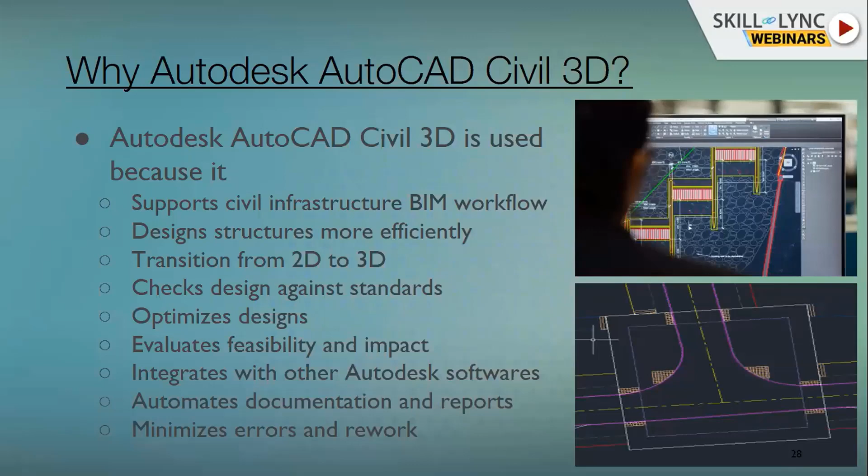It compares in 3D as well as 2D, so that we can visually see where we are standing in the design, and it makes our work much easier.

So here also there are lists of parameters where we can use. As I was saying, documentation to delivery standards will be made smoother, and we can configure and customize those parameters. We can deliver 3D models directly to different machines.

Once we do this, we can just give it to the surveyor or the contractor. We can use those 3D parameters for his automated machines for the construction of the road. So that also we can do very smoothly here.

Apart from that, there are multiple softwares which do highway designs. We can export from that software and build it into this Civil 3D application in response to project changes, because all the features are interconnected.

We can run through the process very quickly. Again, the design changes automatically update, and it provides better estimation of materials and dynamic calculation - those analyses also we can make.

It shares and updates the model in real time, because nowadays clients expect all models to be uploaded to their cloud base. We work directly in the cloud, so that whatever changes we make here will be uploaded and checked by the clients directly, without any separate submission. Only through emails we communicate that the model has been updated, please have a look, so the client sees it in the cloud.

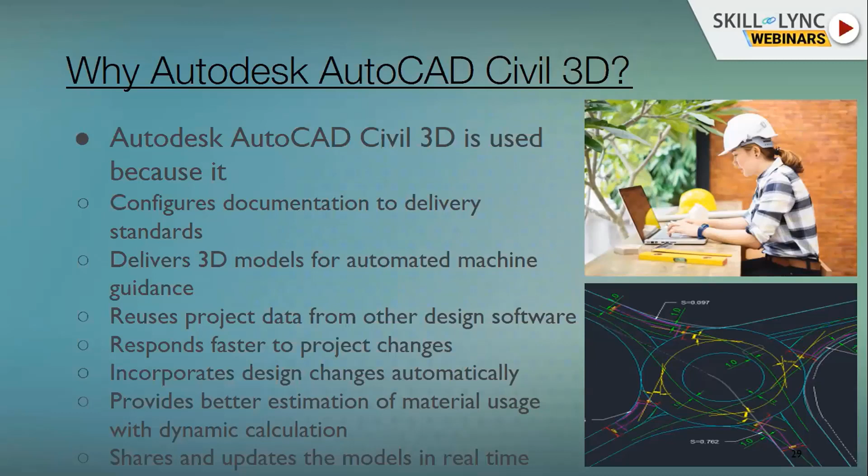So the design updates, and those are the many advantageous things we can achieve using these applications.

Next, I will try to show the workflow of Civil 3D applications - the standard template. It's not compulsory to follow this process, because around 80% of the time we will follow this process only, since every project is unique and different. So we need to take the project within their priority, and give the input to Civil 3D, and we need to design.

But overall, there will be a standard procedure we need to follow. That process I'll be explaining in the following slides.

So, AutoCAD Civil 3D workflow basically - what I try to say is AutoCAD Civil 3D features a range of design and analysis objects within the three-dimensional dynamic engineering model. So it gives an option for a designer or analyzer to make his decision on how to go about a road project in a standard manner, so that it can give the best design, safe design, to the end user.

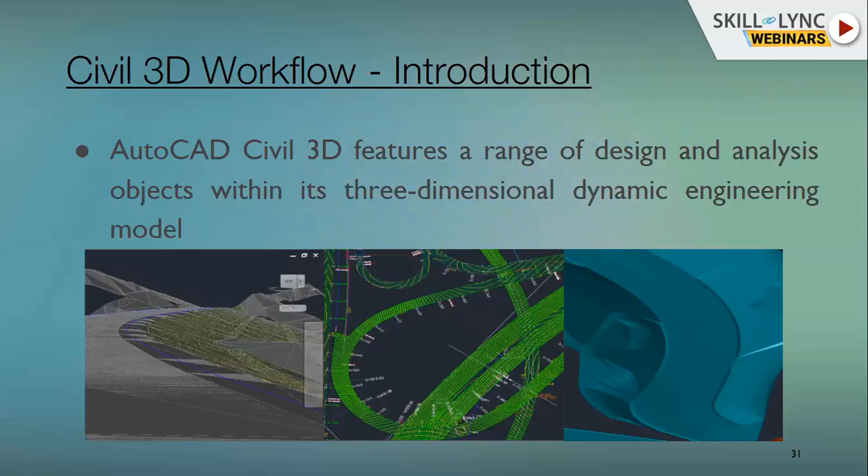So the basic workflow will be: whatever survey data we need for the design of the highway projects will be collected first. That may include points, lines, surfaces, or alignments, or even the corridor directly. So that can be imported first, and we try to do the design accordingly.

All the objects of Civil 3D have a hierarchy that can be viewed in the interface component called the Toolspace. As I was explaining in the overview slide, all will be controlled in the Civil Toolspace command, starting from the survey, alignment, corridor, and the report generation.

Once we familiarize with that, the next parameter, which we need to do prior to going into the further steps, will be the label styles and edit label styles, which is very important. It decides how the cross section looks, how the DTM or the road surface looks, how the alignment looks, how the corridor superelevation looks, or visibility looks, or the final output, like the drawing, looks. All these are controlled by the label styles, so we need to prepare that first.

Many times, each consultant, for example, will have his own set of style sets, what they use as standard. So they will create it separately, and we will use this for all the projects. So we need to create it first. That can be controlled using these settings commands.

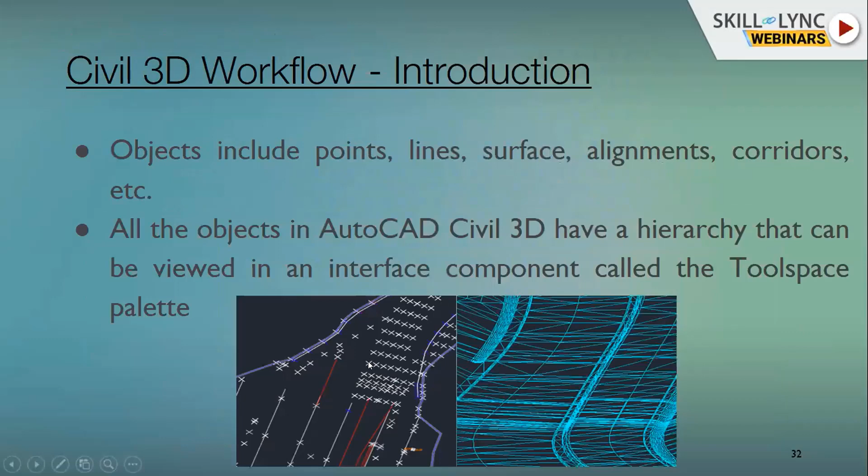For example, this one, these are the points, we can use them directly, and these lines are called breaklines, which we can use to generate the DTM or the triangulation, as we call it in technical terms, to create a DTM or the survey surface.

Another format will be the LandXML format. This is one important export format of Civil 3D, where we export survey data from another design or another team. We can just take their design or their data directly into our Civil 3D application.

So for all the parameters we showed in the Prospector tab surveys, you can see here these are the scenarios where we can import all these parameters. And if you just right click in this portion, there is an option called export to LandXML. So you can export a particular survey you have created for that region, or a particular alignment or particular corridor, or we can just export in LandXML, and we can use these features in other drawings as well, for other designers or other clients, whatever it is, we can just transfer the data. So that's one import method.

The other will be Genio. Genio is nothing but the other applications in the export system. That also we can upload by using separate toolbars where we need to do the add-ins. Add-ins are nothing but extra features in Civil 3D where we can add other applications to Civil 3D. For example, if you are adding a vehicle tracking system, it's a separate software developed by Autodesk. That gives you the path of the vehicles, how they go in the junctions or a curve exactly. So that we can install separately using the add-ins, and we can do the designs.

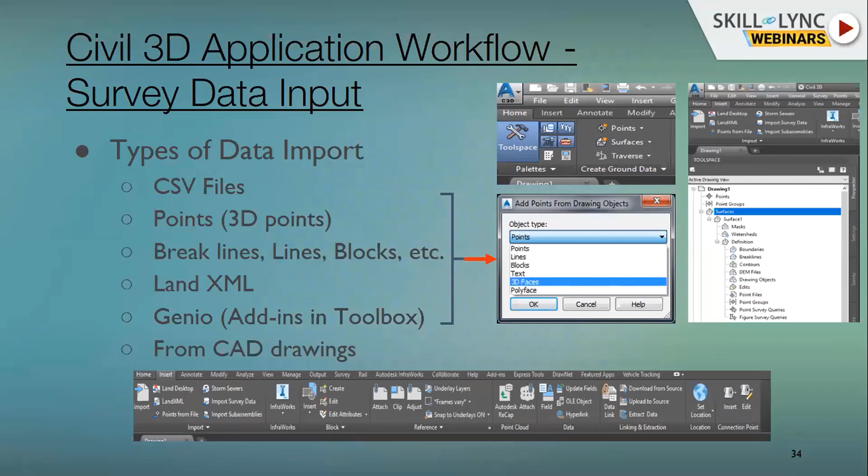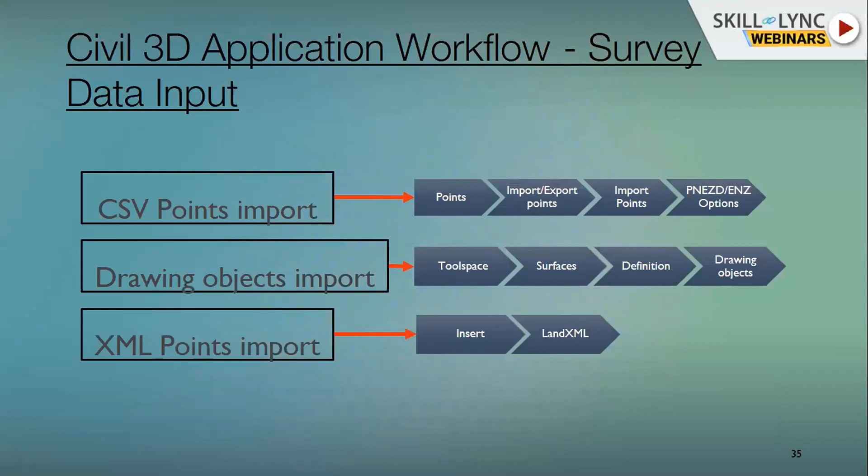The other option is that from the CAD drawing directly we can import the survey data here, because of course this is a CAD platform. The backend will be AutoCAD only, so we can take care of that in this design. So moving forward quickly, these are the processes I would like to share, like CSV point import or drawing object import. What are the steps we need to follow? This is the procedure we follow: how we import the survey data, and how we can create the surface over here.

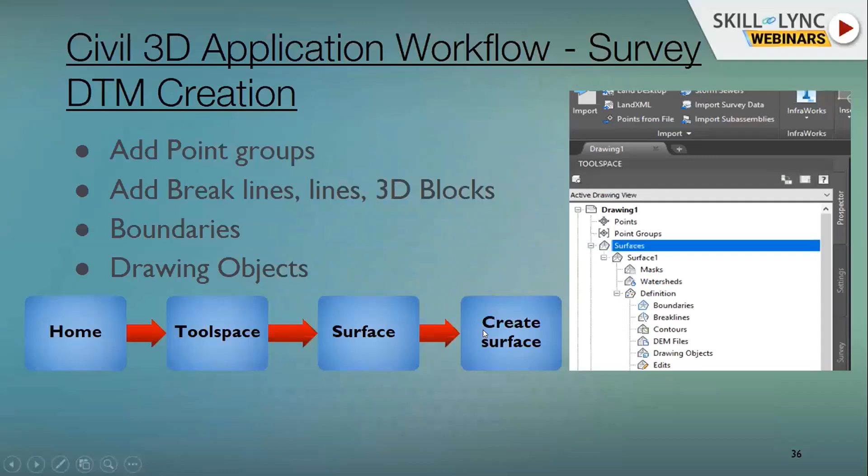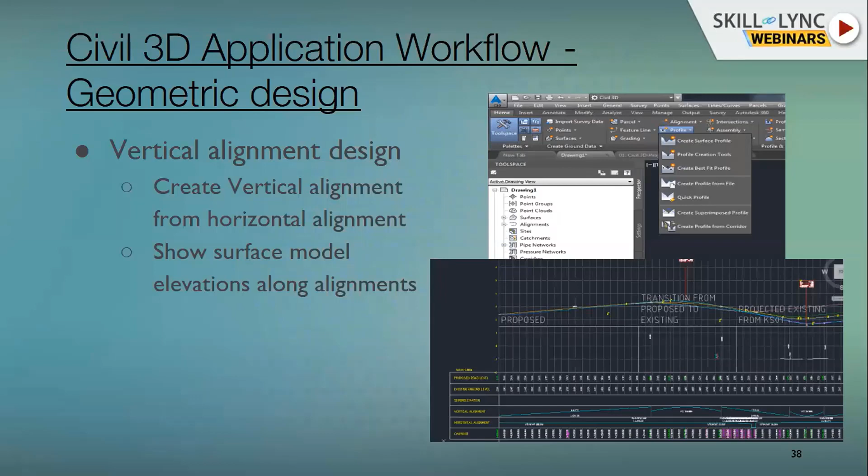So those two parameters we need to take care of while designing the vertical features as well. So it's very user friendly, very direct to approach. The only basics we need to know are the scenarios, or the standards we need to use, like the grades, minimum grades, maximum grades, sag and hog curves, K values. If you know those parameters, we can directly jump into this one, which gives all the instructions in a user friendly manner. So very easy to use.

If you check this one, it gives different options of carriageways, different options of lanes, different options of shoulder, the verge width and all, or the embankment, or the barriers, or the footways, or the curb. So all these assemblies will be there. We will join together the sub assemblies and create an assembly over here. In Civil 3D language, we call it assembly and sub assembly.

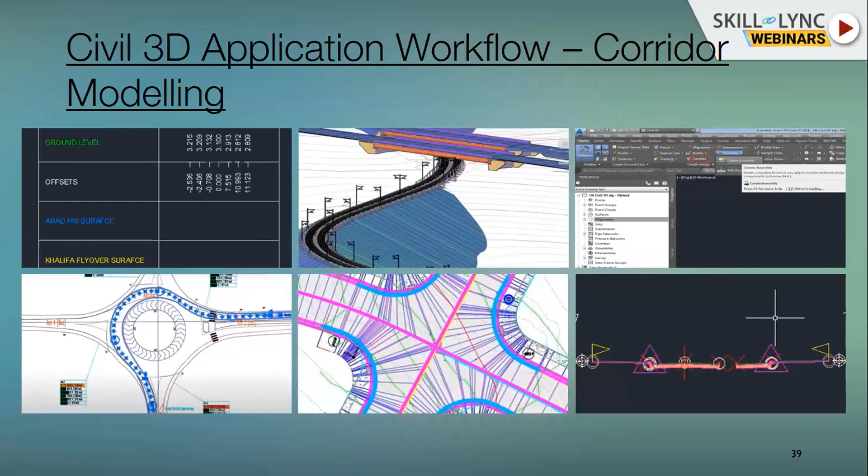Assembly will be this whole part. Subassembly will be each parameter, like a lane, a curb, or an embankment, whatever it is. So those are all subassemblies. We will join them together to form an assembly. That assembly we need to run through this corridor for that particular alignment, particular profile, particular ground. Once we do that, it creates a corridor for us, which gives you the cross-sectional thing in our design. So that's how the process will be. It's a simple process, very easy to use, and very user friendly, I would like to say.

So next I would like to talk about the super elevation. Super elevation, of course, will be one important factor for designing any corridor model or cross sections. So Civil 3D has a separate tab for super elevation. Here you can see. Once you develop the corridor, if you click the corridor, it gives some more options in the ribbon bar for analysis and editing purposes. So we can edit the corridors in a million ways. In that option also, we have the option called super elevation.

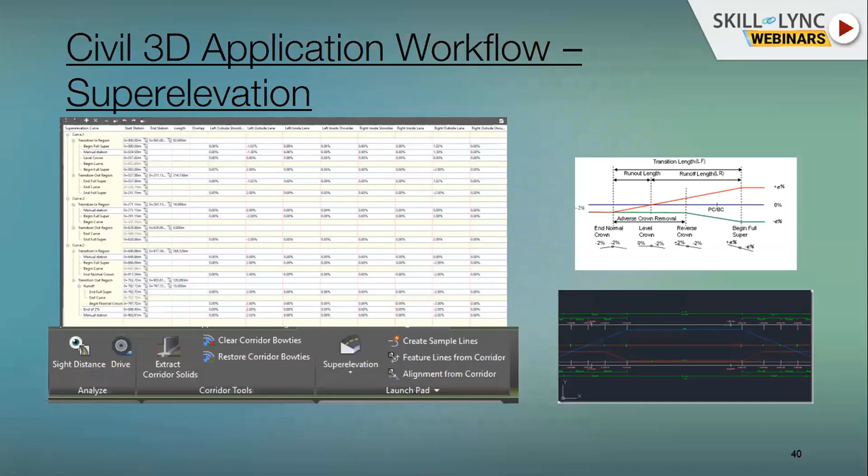So super elevation we can control here, depending upon the carriageway. The chainage we can feed in this one, and the different kinds of lanes are there, like 4-5 lanes. For each lane you can place the percentage values directly, as shown here in the image. Each lane has a different percentage for different sections. So the calculation has to be done, and we can place those values, and those values are used for export purposes. Those are the basic things we can do, but it is very flexible. That's the message I would like to give. We can easily feed these values and do the super elevation analysis and design very quickly.

So next, coming on to the Civil 3D visibility, which is like maybe in a junction, or in a vertical curve or horizontal curve, we need to do the visibility. For that one also, depending upon the standards we use, we can use this item in the analysis and do the visibility parameters as well.

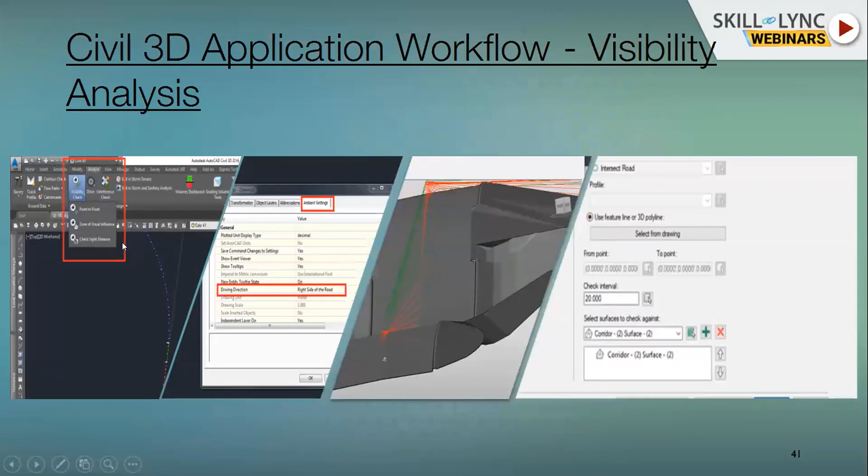So coming to the volume calculations, again in the analysis tab, you have the dashboard for the volume calculations. Of course it is user friendly. It asks basic details like about the ground and about our design ground.

So we can just compare all together and put it into a sheet of information, and we can get the quantities very easily. We can do it section-wise or for the whole project area. There are multiple options; it's very flexible, very user friendly. We can just do this one.

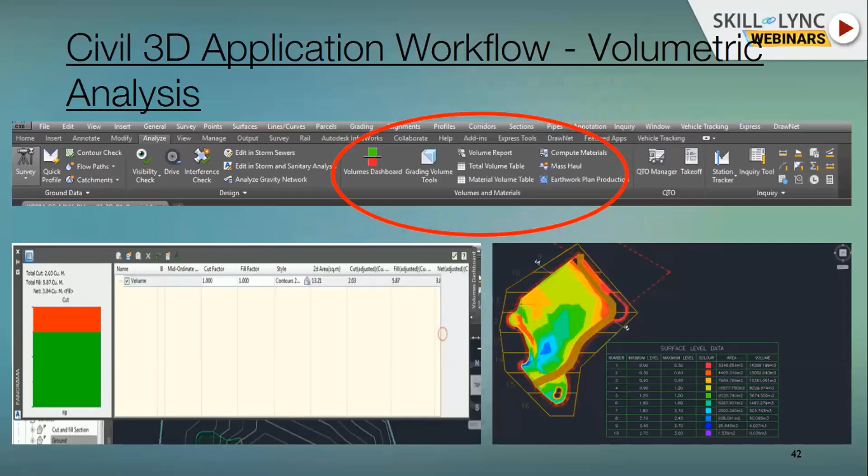So finally, the report generation will be there. As I said, in the toolbox we have this option called report generation. As you can see, there are multiple options for report generation. We can do it for horizontal curves separately, design criteria, all those parameters, setting out, or the stations; all these design parameters we can take out from the Civil 3D application. Very neatly presented.

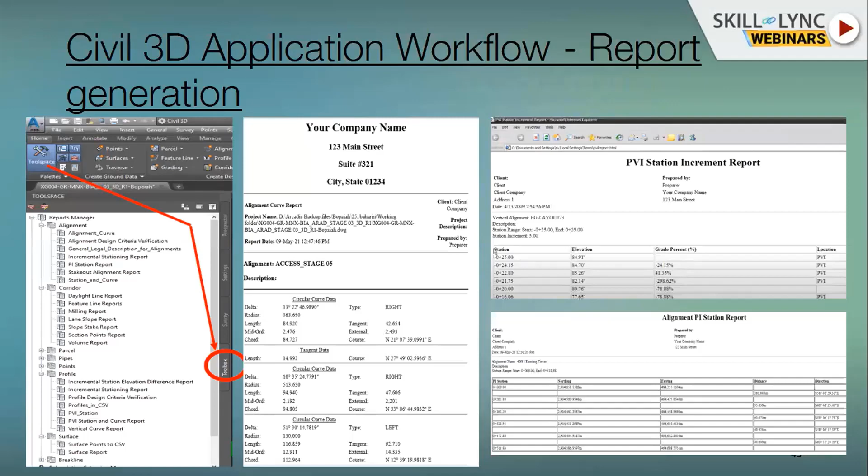We can also customize it in the process however we want, and export it into PDF or Excel format for further calculation and further analysis. All those parameters we can do in this report generation. So this will be the final drawing output. This is the example I would like to show.

Each consultant firm or client firm has a different drawing output format. In this case, I would like to show what the plan and profile output will be. We developed this one in AutoCAD. If you are using AutoCAD, you may know the feature called XREF, calling up different drawings using the command XREF, external reference. Using that, we develop these cross sections or the plan and profile drawings for the final outputs.

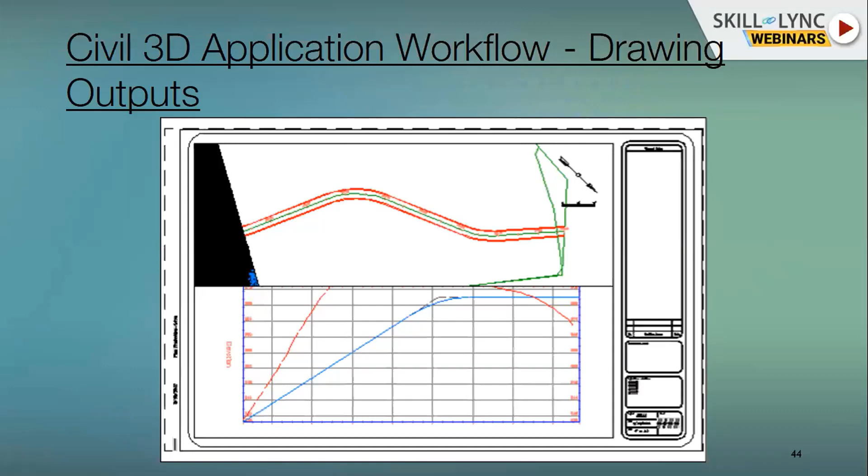On the right hand side, you can see we can give any legend, key or notes, or parameters like the stages of drawings, the client name or consultant name, and the basics like project name, drawing number, and scale. Those parameters we can finalize here and set a sheet output. That output can be used directly using XREF. Those are the advantages we have in Civil 3D.

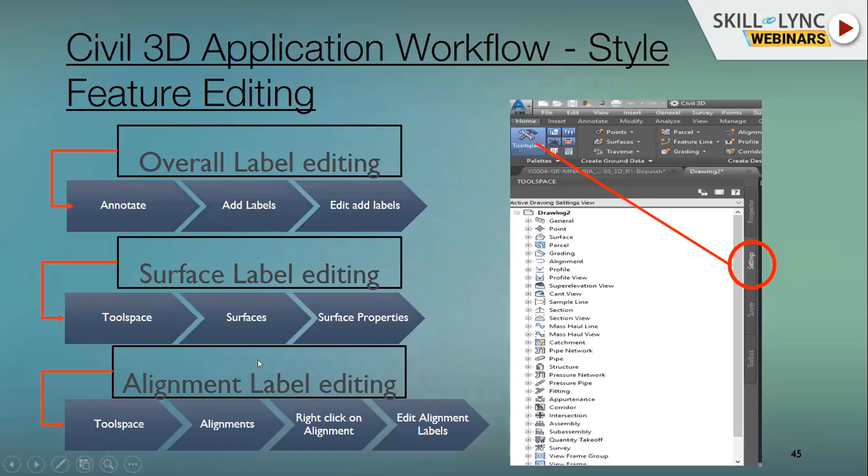So again, coming back to the style setup, this is the process we follow: overall label editing, surface label editing, alignment label editing, and how we can update things. Other features I would like to show are grading and pipe network. Grading is used if you want a constant slope between two different elevations or between two different surfaces.

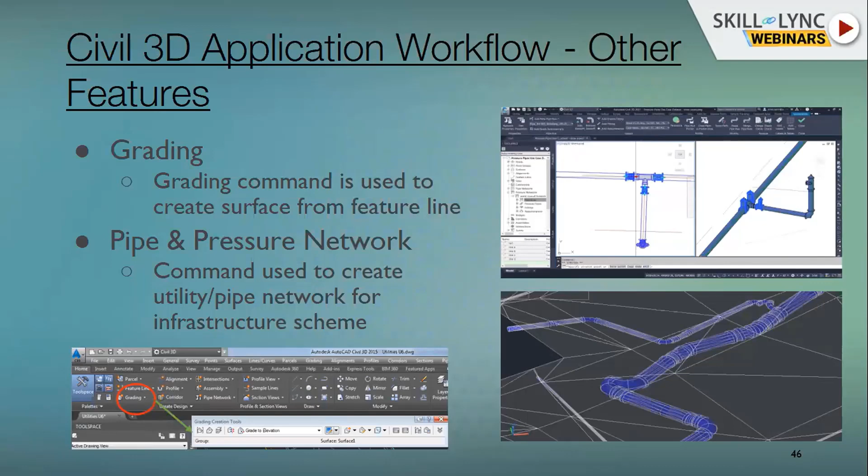Pipe network is a three-dimensional feature we can use to develop the underground sewer network, water network, or the OFC cable network. All those options we can additionally do. Apart from that, we have rail design as well in Civil 3D, which is also advantageous. So that being said, that is the basic process we follow in the Civil 3D workflow.

Similarly, we used one such template to create a model intersection design for our case study. I'll go through this project briefly. Basically we followed the steps I described: the template, importing the data, creating the surface, creating the alignments, corridors, modeling, super elevation, the visibility check, and finally report generation and the drawing outputs. Those are the basic procedures to be followed.

Yeah. So briefly about this project: you can see this is an intersection roundabout, which will be developed into a grade separated interchange because of the increase in traffic and future development. From the analysis and planning, we concluded that it requires a grade separated road, because with a traffic signal we can't control this huge amount of traffic. It would create longer traffic timings.

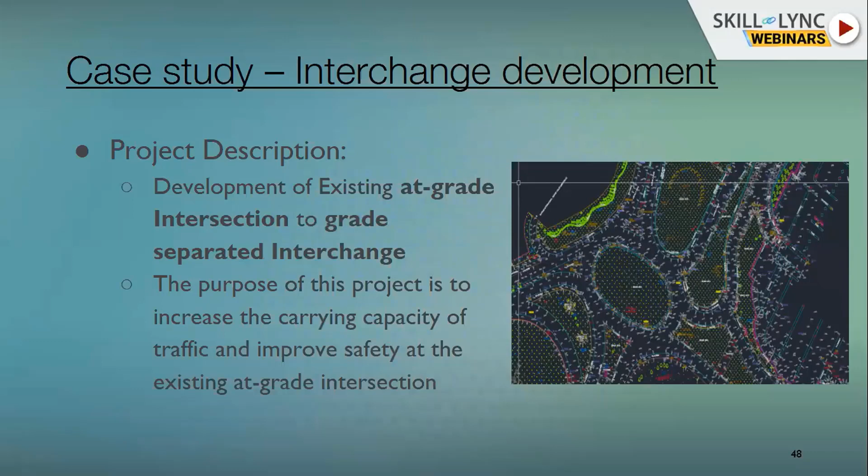To avoid that, we use the grade separated interchange, and we did the analysis and design for this one. This is one particular junction from that site. We took it for our development purpose, and all the points and text you see are the existing survey data we received from the survey team.

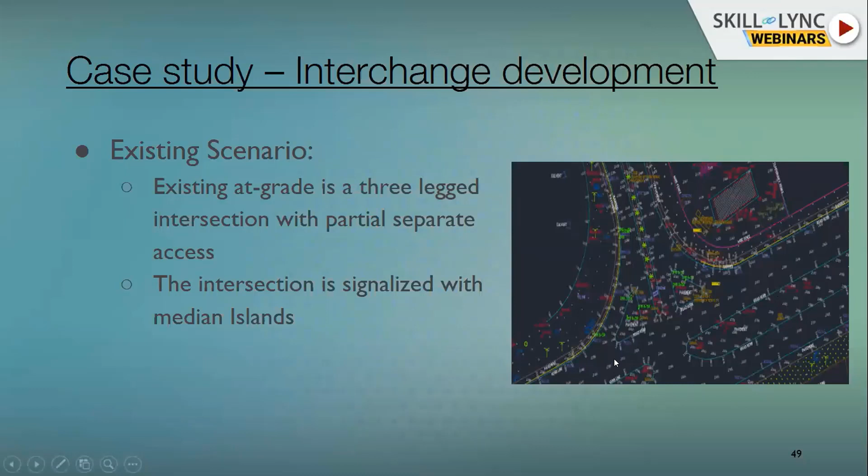So that has been plotted into the AutoCAD drawing directly. So we use this data. It will be all the data, and data will be in 3D format. Maybe it's 3D lines, or maybe it's a point, or the text. All will be in 3D. It has the elevation at this point. So we use that data for our design as well as modeling purpose.

So first will be development of the existing ground scenario. So all the data we have, we developed in Civil 3D applications. We called all the points, all the lines, and the text as well. In some places we require that. So all these parameters are used to create an existing ground surface. We need the base first. So the base will be the existing ground surface.

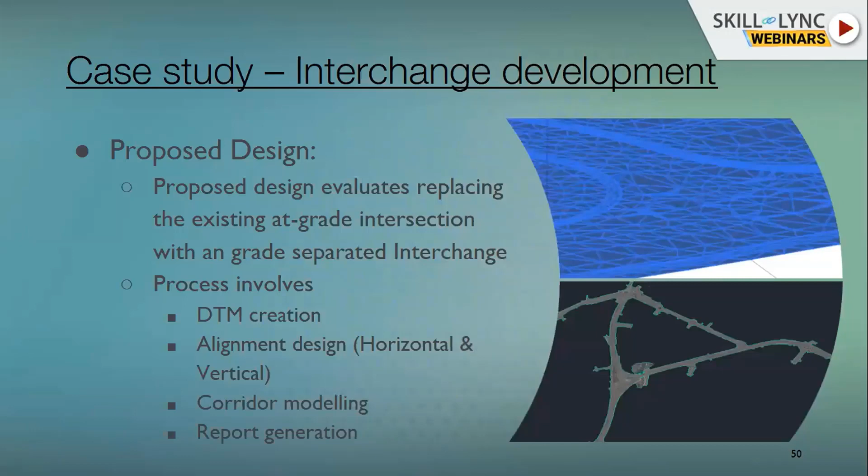So we need to analyze the scenario first, how the ground will look like, to further do our design of alignments and interchanges and all. So that we have created in the first place using the Civil 3D applications. So this is a project site basically taken from Google Maps, as well as the satellite image.

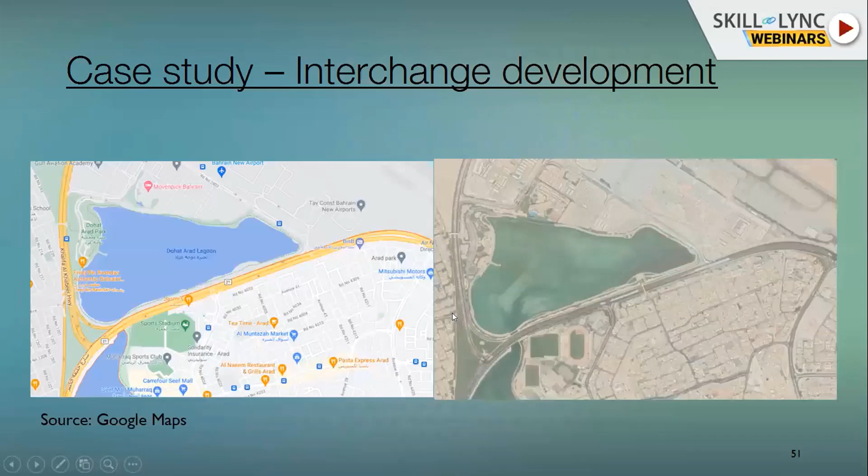So you can see a junction here, which will be, sorry. I'm sorry. Yeah, which will be developed into the interchange. So this has been developed into an interchange. Here you can see this is a 2D plan, but in 3D reality, the roads, you can see this is the main carriageway, dual carriageway, which is passing through the road directly. So these are the connecting elevated interchange, which is grade separated, going above or below the main carriageway.

So that development has been done using these applications for this interchange design, using the parameters I was mentioning in the earlier workflow of Civil 3D. So basically what we did is we had the existing ground, and we designed the alignment using all these features, and the vertical profile depending upon the interchange standards we need to give. That depended on the carriageway as well as the design standard of that particular area.

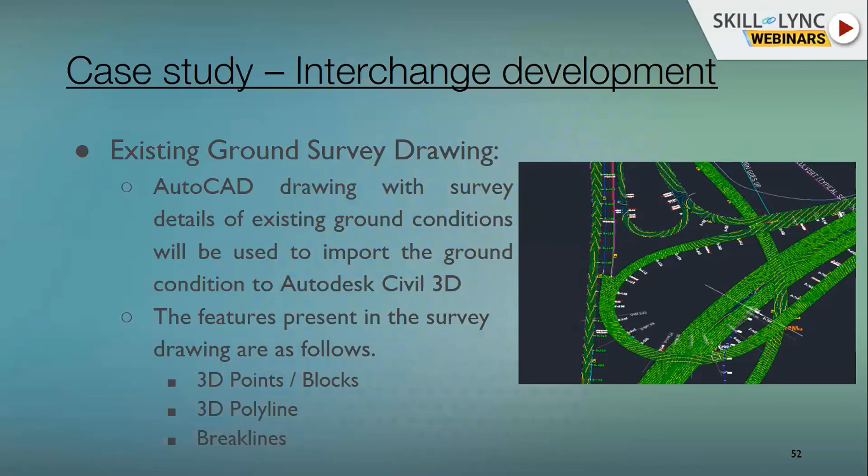We did that, and we developed the corridor model using the assemblies and sub-assemblies features of Civil 3D. So that has been uploaded into this design. So finally we clubbed all these parameters, and we created a contour map for this particular junction using all these parameters in Civil 3D only. So the final DTM generation for the proposed one also we need to provide. So whatever we construct, whatever we design, that also will be surfaced in this model.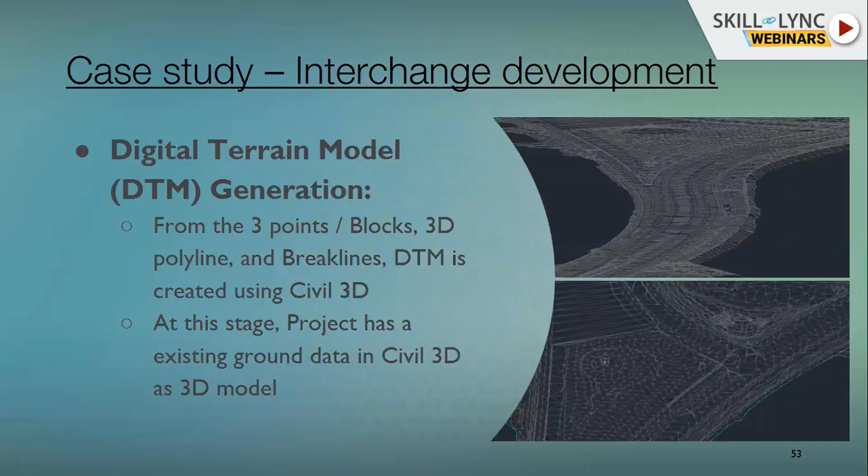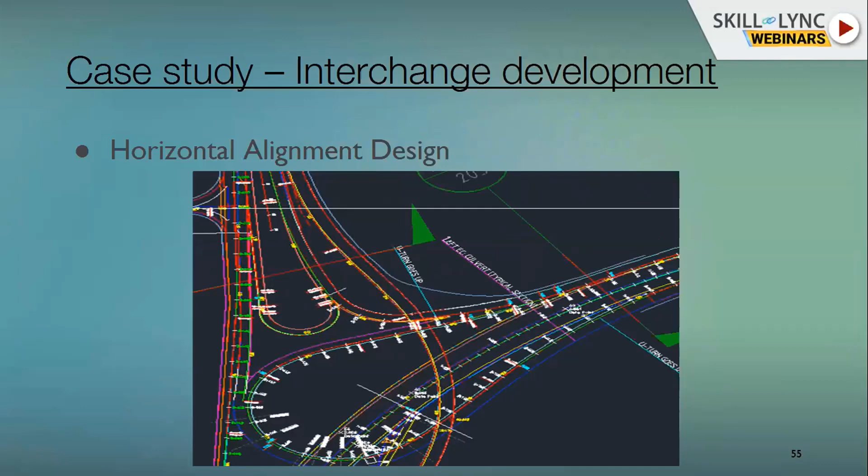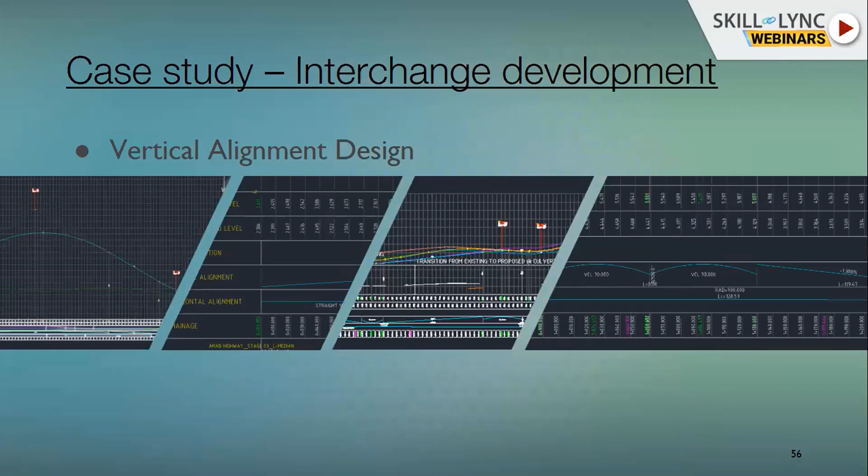So this is the horizontal, how we developed these horizontal parameters. So these are the basic idea. All the features used, we use Civil 3D only for this one. The approach may be different for different projects, but the concept will remain the same for highway projects. So this is the vertical alignment design, and this is the cross section corridor modeling. This is the assembly point, and these are the cross sections we are trying to show here.

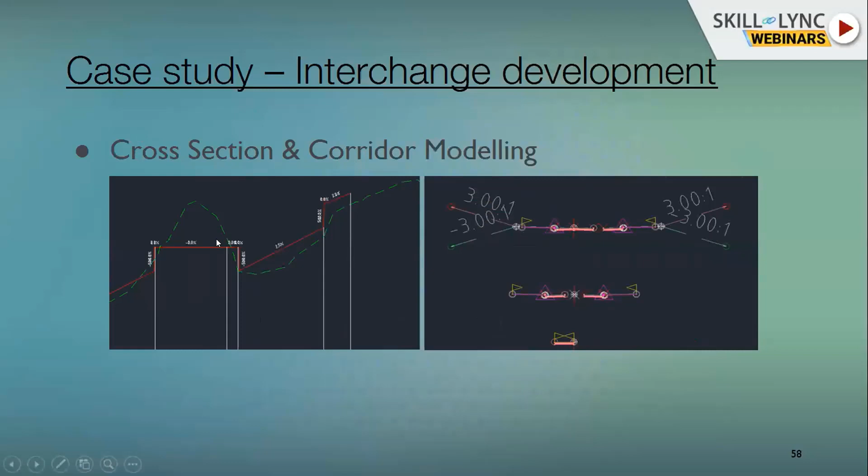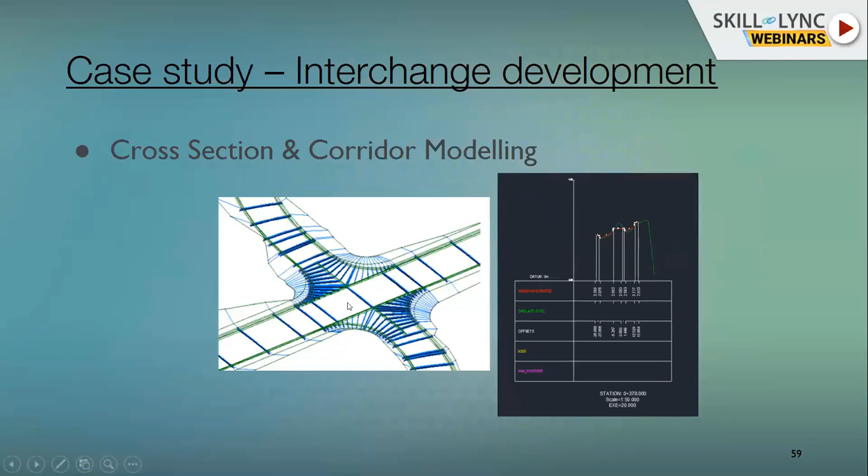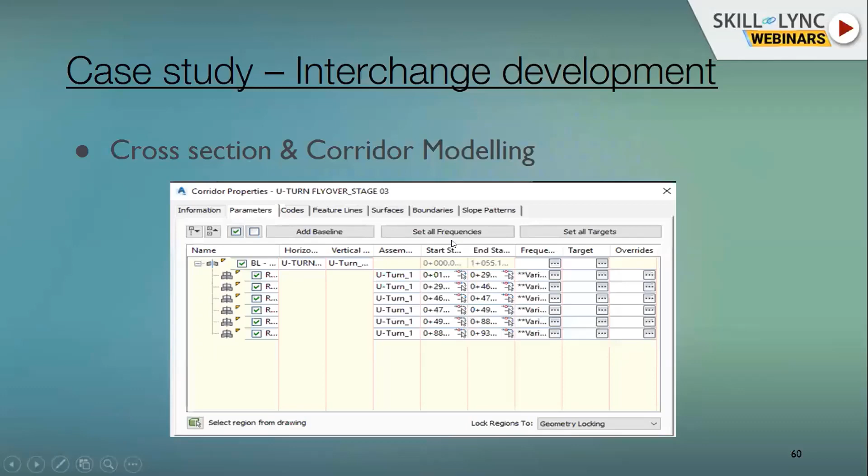And finally this is just a section of that project where we try to develop the model of the junction here. So this is the corridor model analysis we did for different regions. We had different assemblies we need to provide, so all that we can control here. So these are in-depth knowledge. Once we start using this application, these words will be very familiar, like frequency, target, horizontal, vertical things, assemblies, baselines, frequencies, all those standard words we can go through once we start using these applications.

So finally, what we try to show here will be the design contour plan, report generation, and drawing output. These are three parameters the client mainly asks for at the end of the project. So for that, we need to keep it as simple as possible for the clients, so that it should not be a complex thing for anybody to use at the end point. So what we give will be the minimum and the basic, but it has all the data in it.

That's what we need to aim for at the end. So we don't do it in a very complex manner. Complexity should be there in the design, but at the end we need to give it as simple as possible. For that, we just give these three details.

So the contour plans gives all the details of how smooth the junction design is and how it will be used. The drawing gives you the horizontal and vertical cross section parameters to the client. The report again gives how the horizontal values, vertical values, and super elevation values are being used. Those are the parameters we can give.

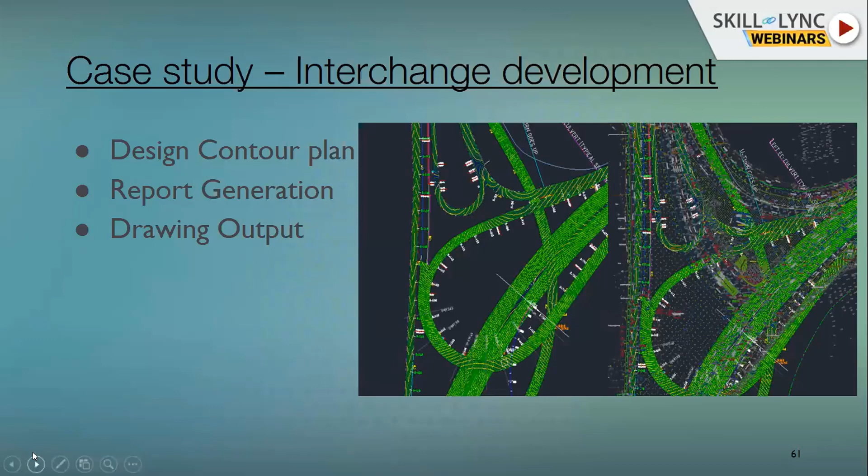Finally, the report generation will be set as I was showing earlier. We can create the report generation easily in this Civil 3D application.

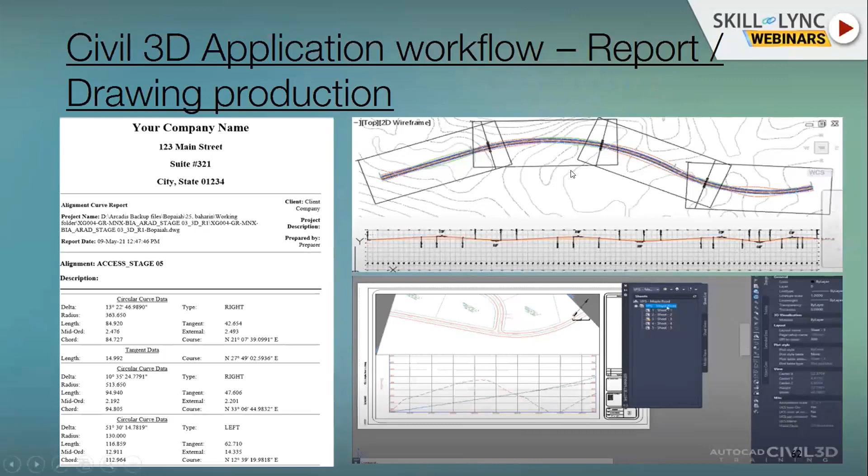So next comes the last part, which is the installation process. We can go to the Autodesk website. It gives all the details about how to download it, how to install it, and how much we need to pay for the application to use it. So we can easily download and install this version. It has a Mac version as well as a Windows version, so depending upon the type of OS you're using, you can do those parameters as well.

To sum it up, AutoCAD is a very vibrant and important application. We can use it for the highway engineering field especially, so there's a huge advantage in using this application, I would say. At the end, anybody can learn this software with basic knowledge of highway engineering, those horizontal features, those codes I was mentioning. If you know that language, using this application is very easy, because nowadays technology has improved.

We have video platform websites like YouTube and all. If you just go and Google what you want from Civil 3D, it appears instantly and gives a brief idea about how we can use it easily with the basic ideas. So we can do it using these applications.

Also, having a different skill set is another factor. As I was saying, it's a very popular application to be used at this point, so we can use it very easily. At the end, I would like to say we can conclude that knowledge about this particular software helps in the job market as well, because it's a happening software in highway engineering consulting firms.